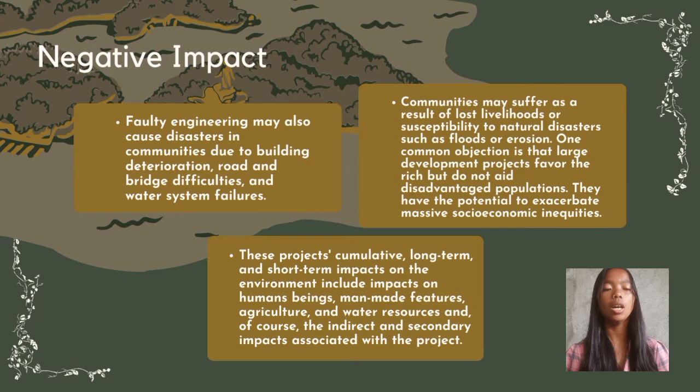So let's go to the negative and positive impact of building dams. Positive impact of building dams: first is hydroelectric power. One of the most beneficial aspects of dams is the potential to create hydroelectric power, which is created when water passes through a dam via a turbine. Hydroelectricity is one of the most studied forms of alternative energy, as it is relatively reliable and stable, and most hydroelectric power plants have low maintenance and operational costs.

Next is controlling waterways. Flooding can be disastrous for many communities, especially if nearby water resources are hard to control. Dams are able to redirect waterways to other areas to keep communities safe or open up more land to build on. Flood control dams specifically mitigate floodwaters by impounding water and then safely diverting it toward other places. Next is as a great source of irrigation: the presence of a dam creates a reservoir that can be used as a great source of water, specifically for farm and industrial activities.

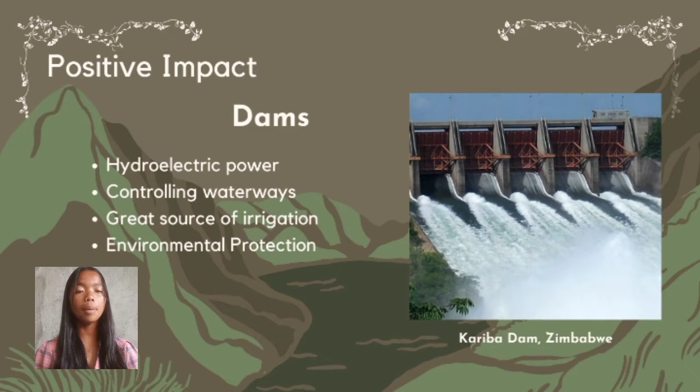Next is the negative impact of building dams. Risk of sediment build-up: when water rushes through a dam and its internal turbines, it can create a great spot for sediment layers to be trapped and congregate, which can then pollute the water and disrupt the ecology of the water environment. Then, damaging the environment: rushing floodwaters replenish the nutrients in the soil and water, which is beneficial to all plant and animal life in rivers and other waterways. When water is diverted due to a dam, it can greatly disrupt the delicate natural ecosystem.

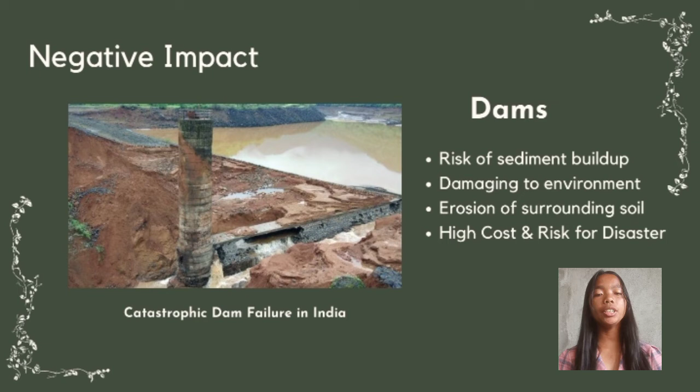Some flora and fauna are able to adapt to the changing conditions, but many will not, and could be destroyed in the new environment. Then there's erosion of surrounding soil. After the construction of many dams, erosion of the surrounding land has been noticed. The large reservoir at China's Three Gorges Dam has eroded nearby shoreline, which has led to landslides along the side of the reservoir. Lastly, there's the high cost and risk for disaster. The cost of building a dam often reaches astronomical levels. The engineering and technical aspects, along with the actual construction, is a time-intensive and laborious process that has to be done with absolute precision.

So let's proceed to the positive and negative impact of building bridges. First is economic impact. Bridges increase cash flow when they join two places that complement each other economically. It can have a powerful impact when an area that has a large money supply is connected to one that has goods or services to sell, or people who need work.

Next is its cost-effective way of transportation. Most long bridges of 1 mile or more come with a toll tax, usually a small and negligible amount. So if you are using a bridge to travel from the mainland to an island, chances are high that you would be required to pay a small toll tax, which incidentally is cheaper than a ticket on a local ferry. Lastly is about traffic.

Bridges, as mentioned earlier, play a pivotal role when it comes to regulating traffic. They are quite effective in redirecting traffic to other segments of the city and help reduce the traffic load on the roads during peak hours.

Negative impact of bridges: first is the natural ecosystem. Building bridges is essential, but it's equally important to take care that the surrounding natural ecosystems are not altered radically, as this can have an impact on the local environment. Sadly, though, most local governments pay little heed to local ecosystems, and as a result it has a direct impact on their environment.

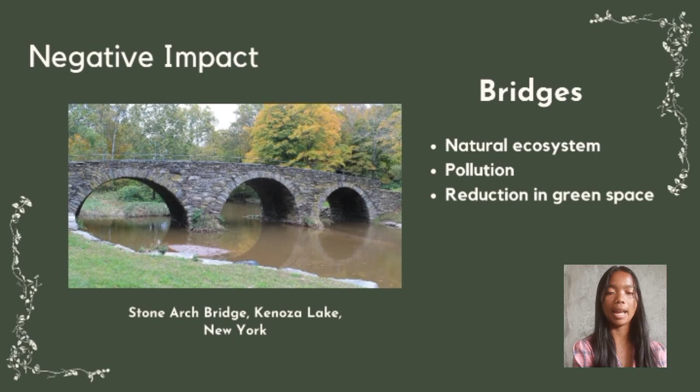So one of the civil engineering projects with an impact on the environment is roads and highways. Let's talk about their positive and negative impacts. Positive impact: roads and highways provide the opportunity of mobility, allowing travel by land. They provide transportation for people, commodities, raw materials, and other items to various parts of the world. Roads and highways improve the livelihood of rural populations while increasing farm yields and profitability. Additionally, these roads tend to draw people to highly profitable farming areas by drawing them away from vulnerable wilderness areas.

For its negative impact, roads and highways occupy land resources and form barriers to animals. They can also cause adverse impact on natural water resources and discharge areas. The three most damaging effects of road construction and management are noise, dust, and vibrations.

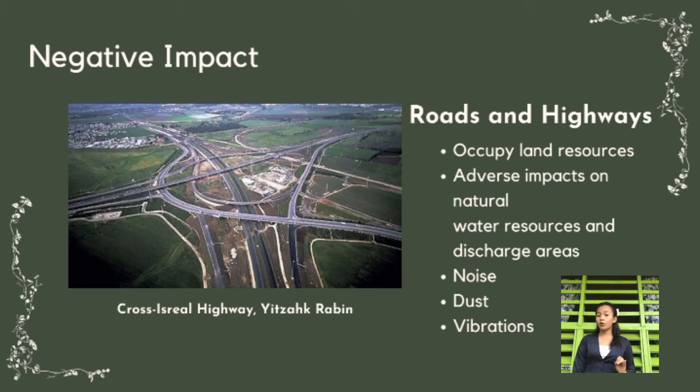The other civil engineering project is railways. Let's talk about the positive and negative impact of railways. The positive impact: when transporting a lot of freight, rail has lower fuel expenses than road transportation. Additionally, rail often has lower expenses for drop trailer programs and lower driver costs. It is more environmentally beneficial to ship goods by train because, compared to trucks, trains use less fuel per ton per mile.

For its negative impact, the most common environmental complaints about railways are the noise, vibration, and the amount of carbon emissions they produce, which pollutes the air, soil, and water, and also causes damage to living organisms.

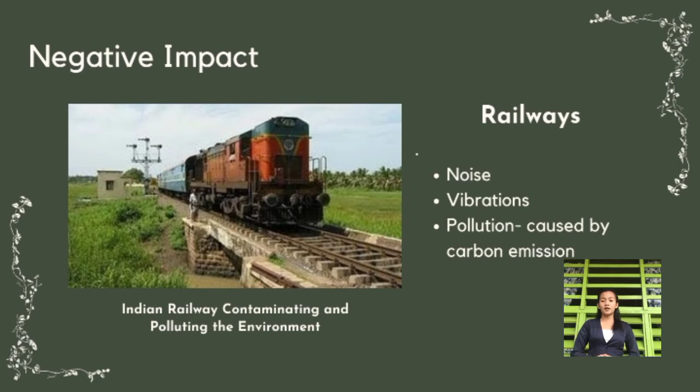Positive impacts and negative impacts of construction sites and buildings.

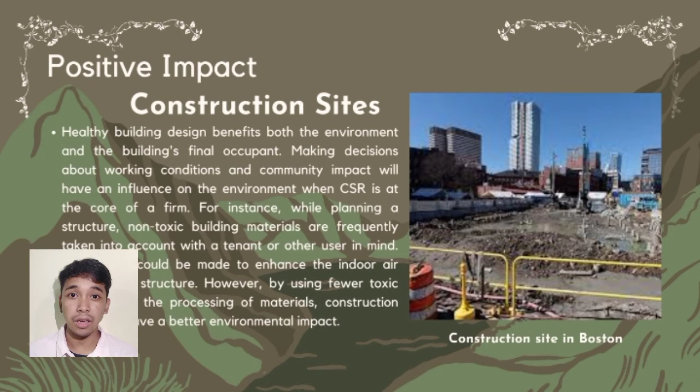For the positive impacts, green construction practices are being introduced to minimize the negative effects of various issues brought by construction sites. Quieter, fuel-efficient tools and machines are now available, as well as recycling and reusing materials where possible to reduce waste. The industry is seeking to make positive changes to their ways of working, materials used, and production to minimize the negative effects of construction and protect the environment for future generations.

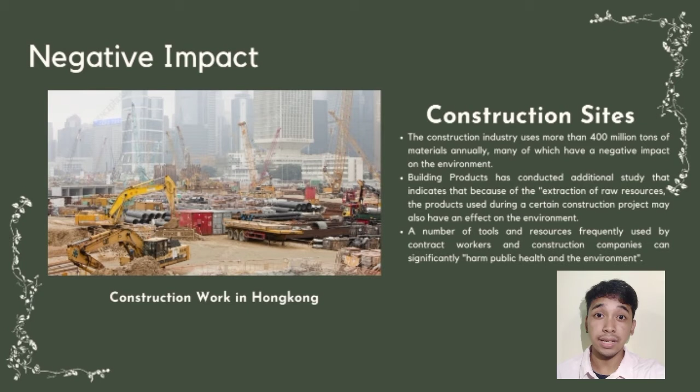For the negative impact, according to some studies, construction is responsible for up to 50% of climate change. It also impacts landfills and air, water, and noise pollution. Construction can be noisy, produce excess waste, and be energy inefficient. Moreover, additional studies reveal that extraction of raw resources impacts the environment negatively.

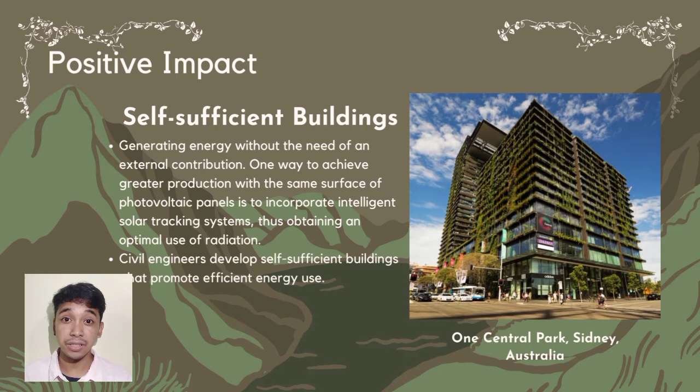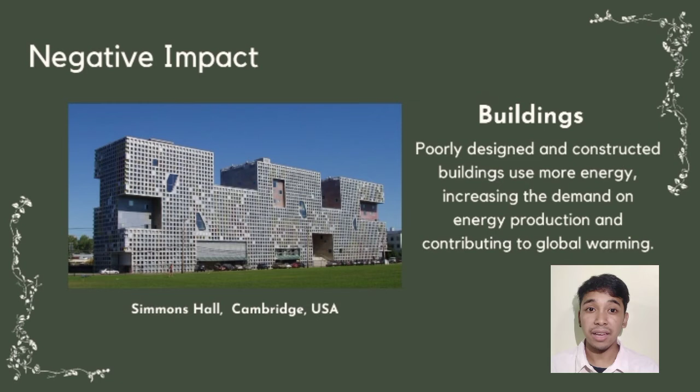The next example of civil engineering project are buildings. Civil engineers develop self-sufficient buildings that promote efficient energy use, which positively impacts the environment. But on the other hand, poorly designed and constructed buildings use more energy, increasing the demand on energy production that contributes to global warming.

The essential ways to protect the environment during the construction of civil engineering projects. The first one is to minimize the waste. Construction produces a large amount of waste materials. There's no way around it, but you can and should look for ways to minimize the waste you're producing, increasing the efficiency of your operations, optimizing the use of supplies and materials, and choosing products and methods that reduce waste are all great ways to reduce the production of waste materials for all your projects. Every little bit really does add up.

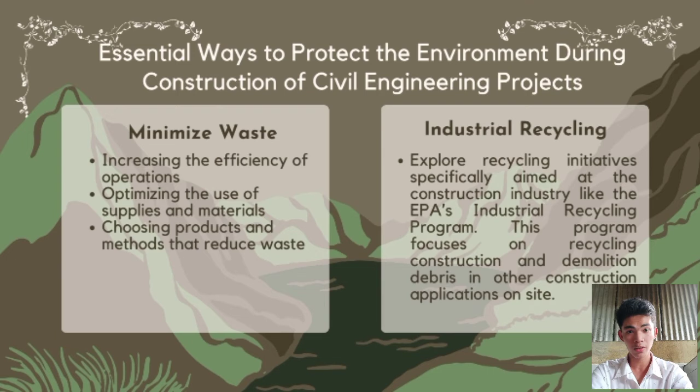And the third one is efficient energy use. Use tools, products, and materials that promote efficient energy use. Look for ways to improve the energy efficiency of your operations, materials used, and final products.

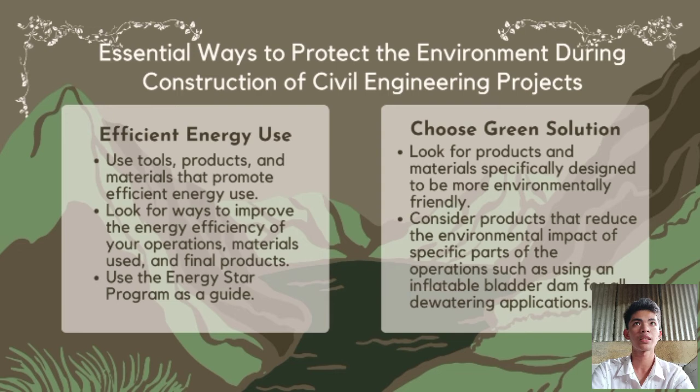And the last way to protect the environment is the protection of ecological resources. It's important to protect the water, the plant life, the animal species in the area of your project. Not only the general public, but take note that the government has regulations in place to protect biodiversity and local ecologies. Your end goal is to complete your project with the highest quality, most efficient timeline, and least environmental impact.